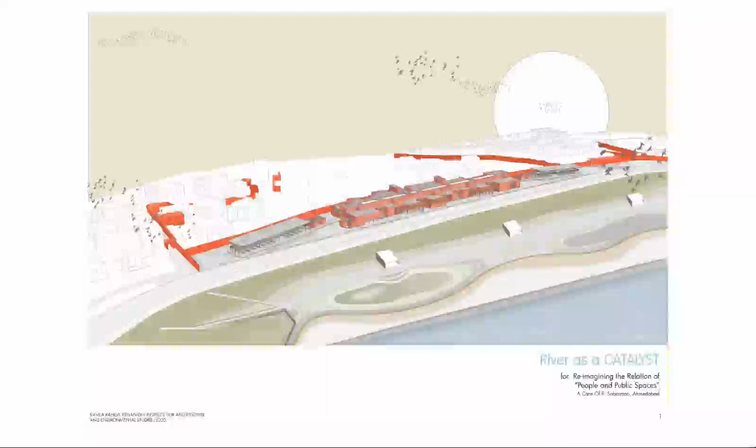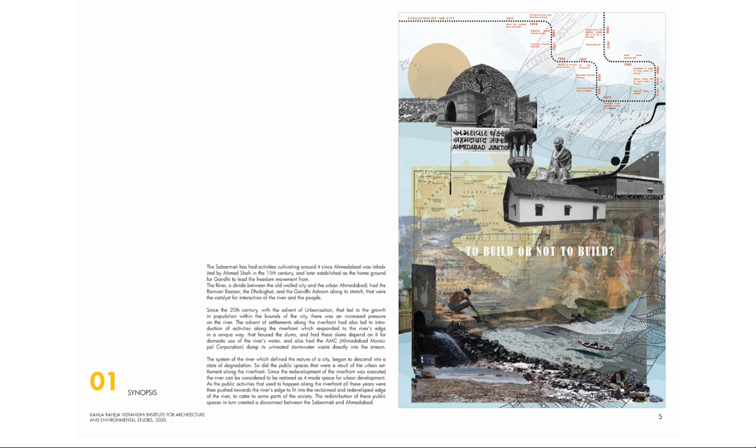The topic of research was water's edge conditions in major metropolitan cities in India. The Sabarmati riverfront, a recently redeveloped river's edge, was meant to enhance the public experience in order to give the river back to the city. The redevelopment project of Sabarmati was initiated in 1999 when an ecological corridor was proposed by architect Bernard Kohn, in order to retain the ecological belt at the center of the city and also not to disrupt the existing communities settled along the river's edge.

With growth in industrialization and urbanization, the community settlements along the river's edge increased in Ahmedabad, thus leading to its depletion, as seen in this diagram.

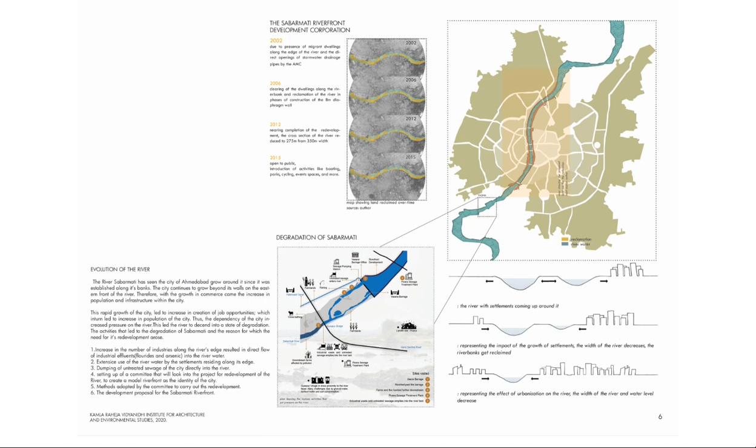In order to bring the public closer to the river's edge and create a riverfront module, public spaces were introduced along the stretch of 11 kilometers on either side of the river's edge. In doing so, the cross section of the river was shortened from 380 meters to 275 meters, and a concrete embankment was created to hold the water that was redirected from the Dharoi and Narmada Canal on the northern face of the city's river.

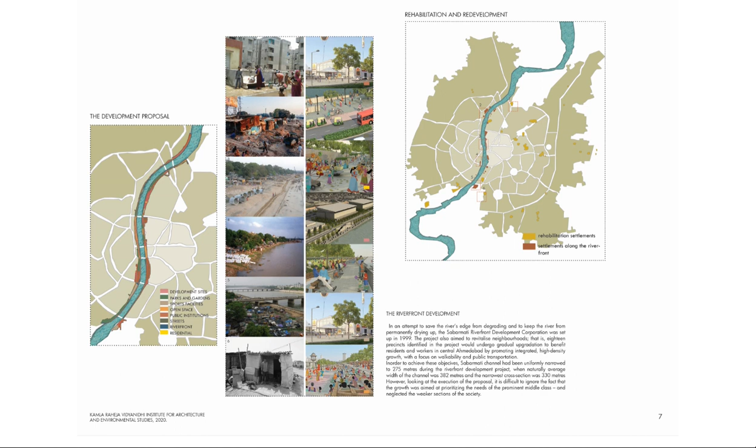In order to study the effects of the development on the existing thriving public spaces along the riverfront, four sites were identified that interacted directly with the river's edge before its development, namely the Gandhi Ashram, the Bhikhabhai Garden and Sanskar Kendra on the western edge of the city, and the Ravivari Market on the eastern.

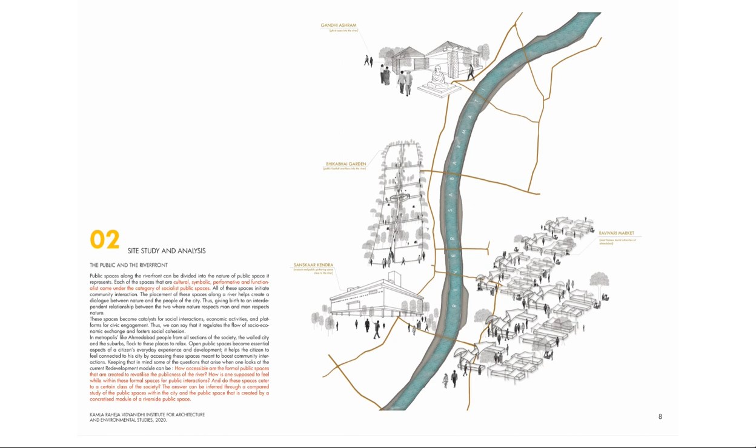The sites were classified into types of public spaces they incorporated, namely the Gandhi Ashram as the symbolic public space, Bhikhabhai as the functionalist, Ravivari as cultural, and Sanskar and Tagore Hall complex as the performative spaces.

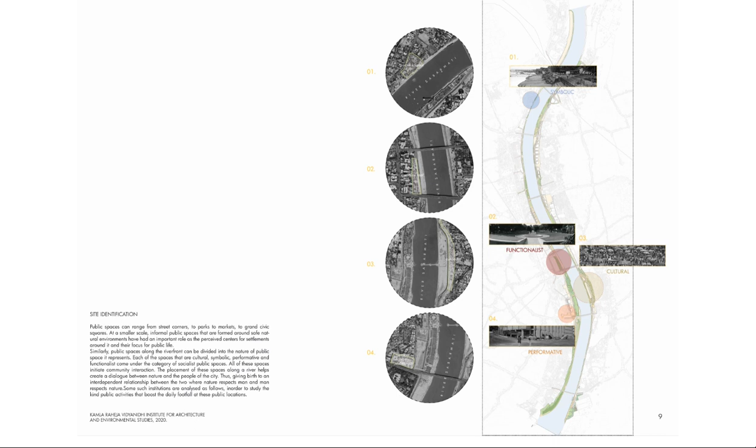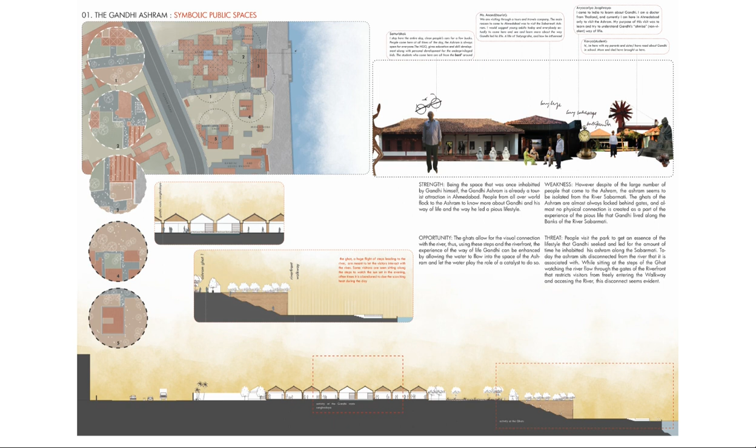The site study was divided into four parts, namely the footfall study of site, cross-sectional study of the activities along the river's edge, site interviews of visitors, and a SWOT analysis based on the above readings.

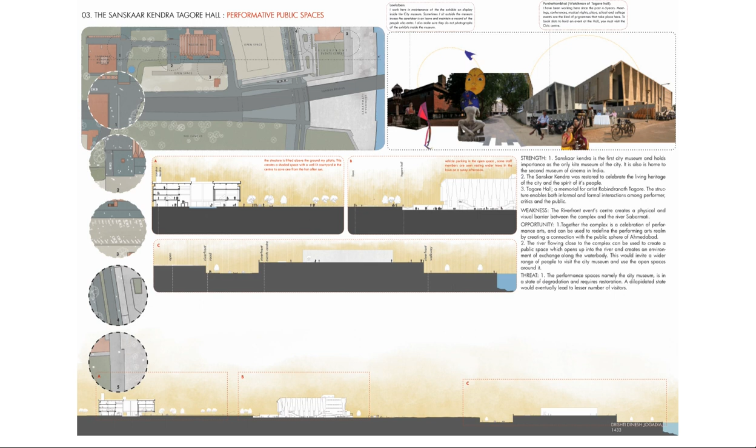This exercise led to the site of intervention being the Ravivari Market, that was later incorporated as a part of the redevelopment proposal by the SRFDC after protests by the Ravivari Gujri Association, as the original proposal took away parts of their land where the market used to take place under the Ellis Bridge, since it was established by Ahmed Shah in the 1400s.

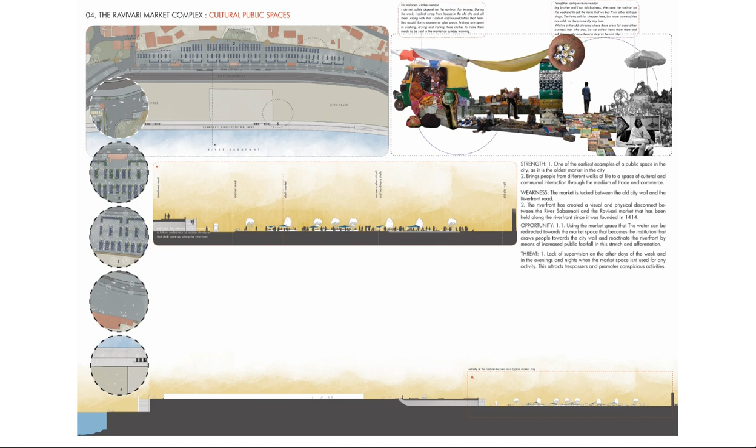The Ravivari lies sandwiched between the elevated riverfront road and the Old City Wall. The riverfront road lies at a height of 4 meters above the market road, which is at the city level. The lower walkway or the lower promenade sits at 7 meters below the riverfront road. The Ravivari lies between the Ellis Bridge and the Sardar Bridge.

The lower promenade acts as a flooding vessel in case of water level rise when the Dharoi Dam is opened once a year, and during monsoons, when the water level rises significantly to a strikingly 8-meter level height. In such a scenario, the lower promenade remains inaccessible for public use.

The neighboring complexes along the old wall include the Gaikwad Haveli police station and housing quarters, religious temples, government offices, and cooperative societies, and slum settlements along the southern edge.

The main points of vehicular access are from the foot of the Ellis Bridge in the north and the riverfront road that allows vehicles to enter the market coming from Jamalpura.

The Raikhad Darwaza also used to allow vehicular and pedestrian entry coming from the old city, but the Darwaza has been shut for use in recent times owing to its dilapidated condition. The market road allows tempos, hath garis, and rickshaws to their loading and unloading sites throughout the market complex.

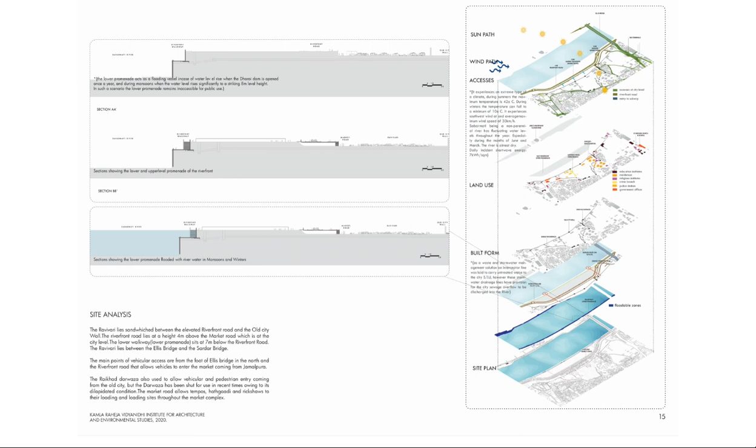Ahmedabad experiences an extreme type of climate. During summers, the maximum temperature is 42 degrees centigrade, and during winters, the temperature can fall up to 10 degrees.

The design development process included doing a study of a wider range of communities along the river's edge.

The programs were divided into public, private, semi-public, and corridor spaces, where the more public programs were placed towards the market road facing the riverfront, and the semi-private and private programs sit towards the old city wall, divided by a central connection as a series of corridors.

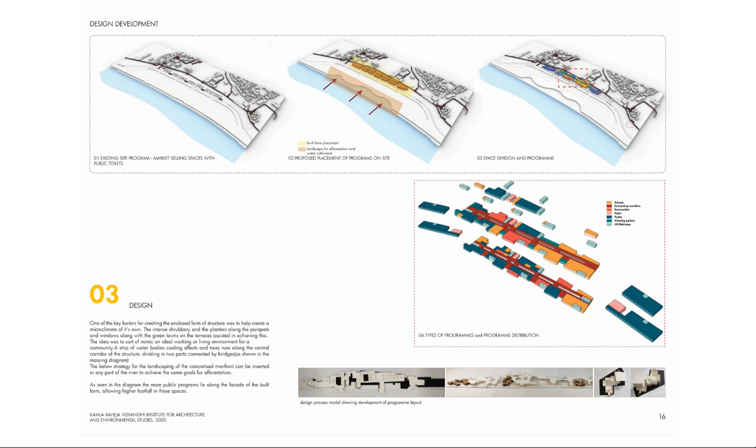The two main principles followed while designing were to revive the connection of the market to the River Sabarmati and to activate the inactive market space during the rest of the week, facilitating active pedestrian connection to the riverfront.

Program strategy: tourism. To cater to visitors of the Gujari market and its heritage, the market pavilion houses a visitors center that enhances tourism along the riverfront. The center includes an information center providing travel guidance and booking support for visitors of the riverfront, the Old Walled City, and the rest of Ahmedabad.

The center hosts exhibitions that boost the art culture of Ahmedabad and provides a platform to exhibit artists' artworks. The Karnavati Art Gallery at Pikabai Garden, in collaboration with the Ahmedabad Municipal Corporation, invites artists to perform and hold workshops at the center.

The market and the Ravivari Association. The market, considered one of the oldest in Ahmedabad, started by Ahmed Shah himself in the 15th century, used to take place weekly along the River Sabarmati. The aim of the redesign was to revive this informal heritage and let it take shape along the river while redefining its relationship to the recently developed riverfront.

In order to attract immediate communities and settlements towards the riverfront to interact with the river's edge and reactivate the presently inactive market space, provisions for children and families have been introduced. Settlements along Jamalpura and the Gaikwad Haveli Old Wall have children who play along the parking spaces and the riverfront road, where they also currently reside. The design provides teaching and daycare facilities for these kids who cannot afford going to school.

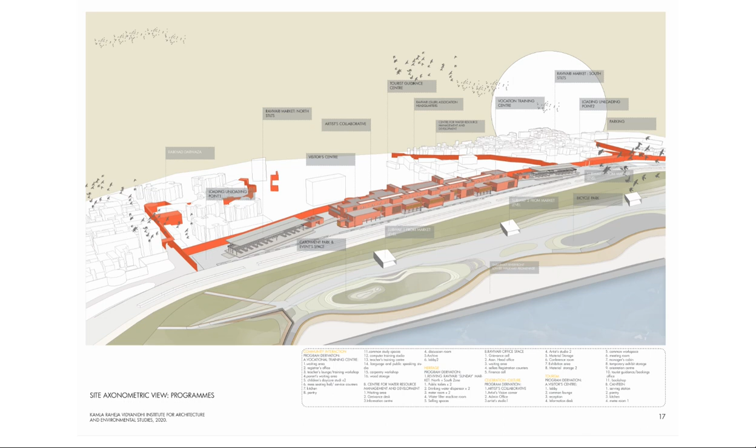The aim of the programs was to attract people from not only the adjacent communities but also different income groups of the city. Based on these factors, the programs derived for creating a more public-friendly riverfront institution are as seen in the diagram.

Loading and unloading points, Ravivari Market North Stalls, Visitors Center, Artist Collaborative, Tourist Guidance Center, Ravivari Gujari Association Headquarters, Center for Water Resource Management and Development, a Vocational Training Center, Ravivari Market South Stalls, another Loading and Unloading Point, and Parking Space. The landscape adjacent to the riverfront includes a catchment park, an event space, and a bicycle park with bicycle pathways.

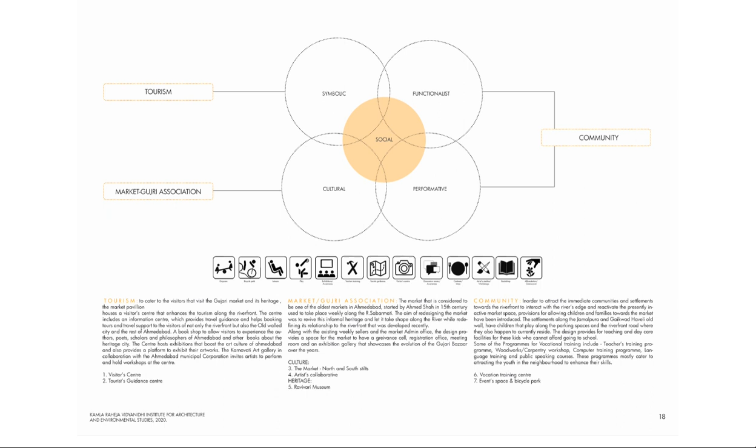Seen here is the master planning strategy for the site. The design intervention can be divided into three parts: the market strategy, the landscape strategy, and the built form strategy.

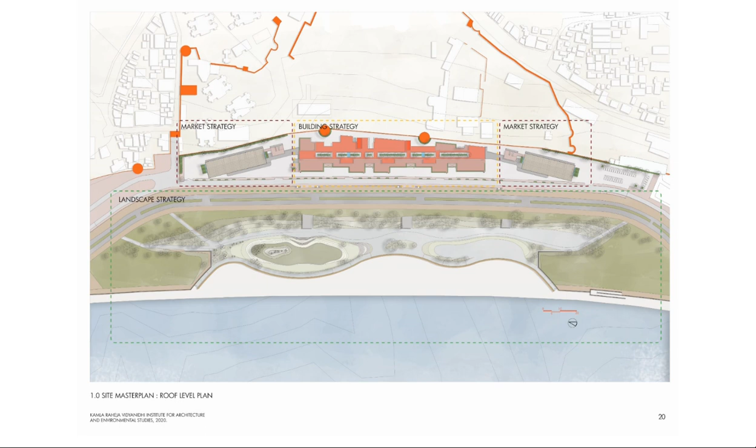Starting with the landscape strategy, the purpose of landscaping, as explained earlier, was to reintroduce an ecological belt along the river's edge for a more shaded and natural arena for public activities like bicycle riding, event spaces, running tracks, and plantation drives, as part of the initiative for the Center for Water Resource Management and Development.

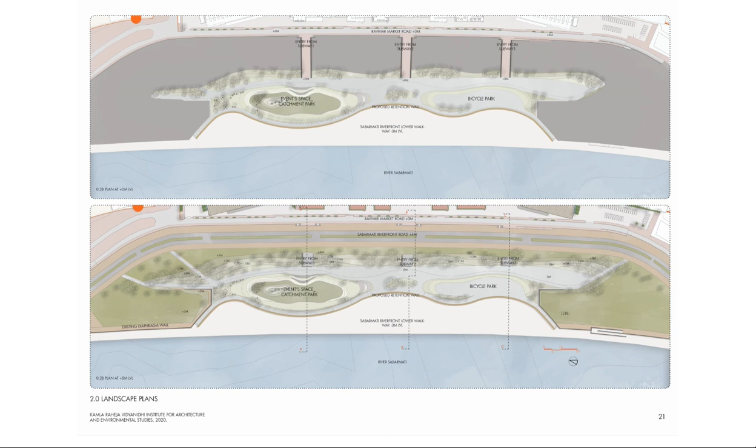The landscape sits between the lower promenade and the market road. The foot flow of the public to the landscape and lower promenade takes place through three subways that lead to the 4-meter level mark, where one can access the catchment park and bicycle paths.

Seen in these sections are the activities that take place at different cross sections along the riverfront.

The form of the landscape was achieved by inverting the existing diaphragm wall inwards and introducing a retention wall to hold the bicycle pathways and prevent soil erosion during water level rise.

During monsoons and flooding, when the Dharoi dams are open, the river tends to flood and rise to fill up the lower promenade as seen earlier. The retention wall introduced allows this overflow to be held temporarily in the catchment park while the water level subsides.

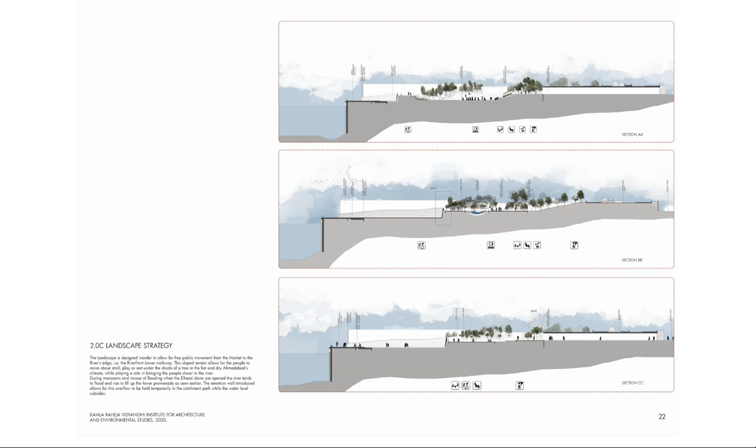Seen here is the ground floor level plan of the market strategy. This includes a vehicular entry, a loading-unloading zone, selling spaces marked by raised platforms 500 mm above the plinth level, connected to a toilet block with a water dispenser system.

At the first floor level, the market is again defined by selling spaces of 500 mm raised platforms for selling.

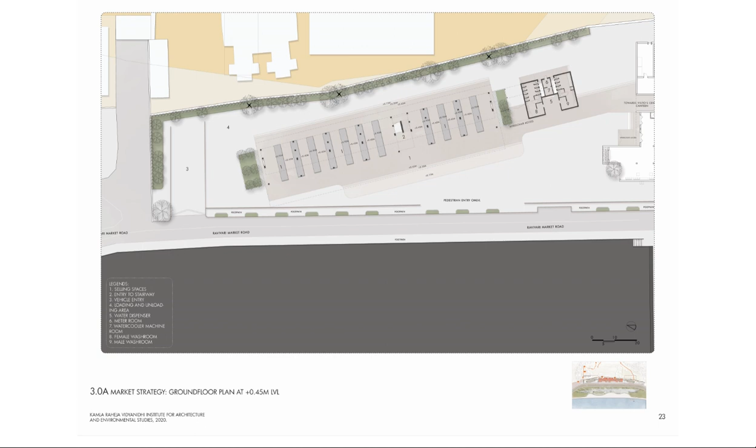The ground level plan at 0.45 meter level for the building strategy includes canteen, visitor center, waiting rooms, artist corner, artist studio, admin, material storages for artist studios, pedestrian entries, toilet block, staircase blocks, registration offices for the Ravivari market, the chairperson's office of the Ravivari market, finance cell, information center and grievances cell for the Center for Water Resource Management, a mess, selling stalls, kitchen, and 2 daycare studios.

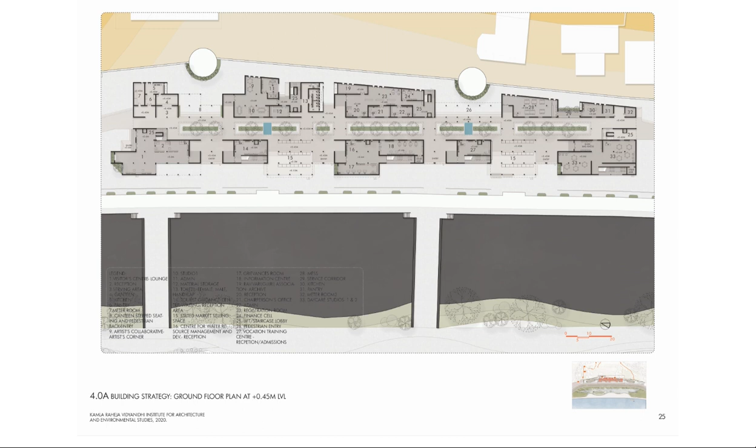At the first floor level, the programs include orientation center, bookshop, artist studio, meeting room, tourist guidance center, admin offices, discussion room, archive, artist exhibition space, open public workshop space, students common area, computer training program studio, carpentry workshop studio, teacher training workshop, and language training workshops.

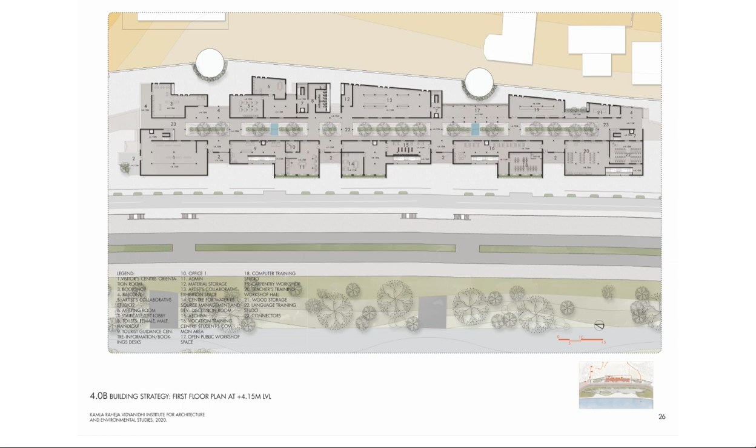At the second floor level, the programs include viewing galleries, terrace decks, permanent exhibition halls 1 and 2 for the Ravivari Market Museum.

A long section cut through the 3 built forms on site shows market activities at loading-unloading points and selling spaces at both levels in the North and South Street markets.

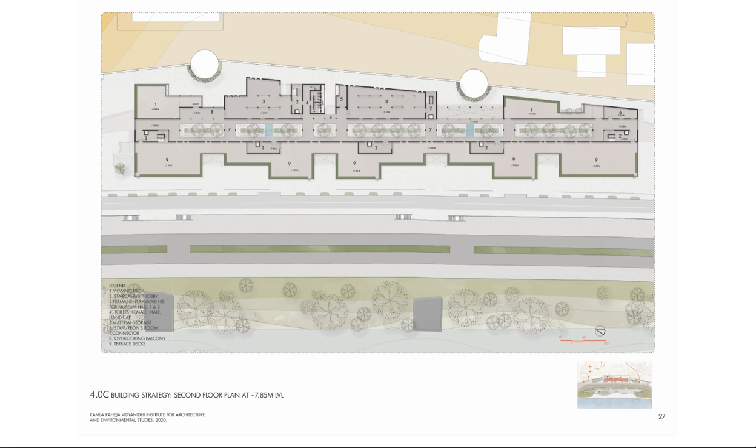The built form shows a staircase at visitor center leading to the orientation room and terrace deck, a balcony overlooking the pedestrian back entry to the courtyards, and a double-heighted public workshop space and entry to the carpentry workshops.

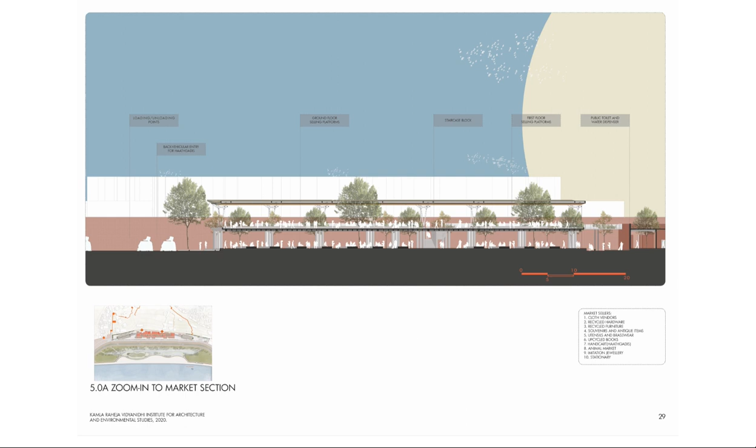Section 2, showing market activities at the ground level stalls between the Water Resource Management Center and the Tourist Guidance Center.

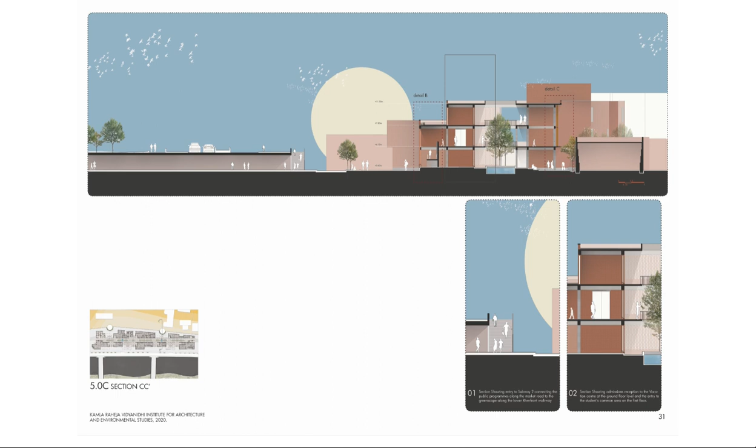Section 3, showing Subway 2 connecting the public programs along the market route to the greenscape along the lower riverfront walkway. Section also shows admissions reception to the visitors center at the ground level at the entry to the students' common area on the first floor level.

Section 4 shows viewing gallery between the visitors center, orientation room, and the tourist guidance center at the first floor level. This section also shows entry from the North Stills Market and the entry to the Artist Collaborative at the ground floor level and the Ravivari Museum at the second floor level.

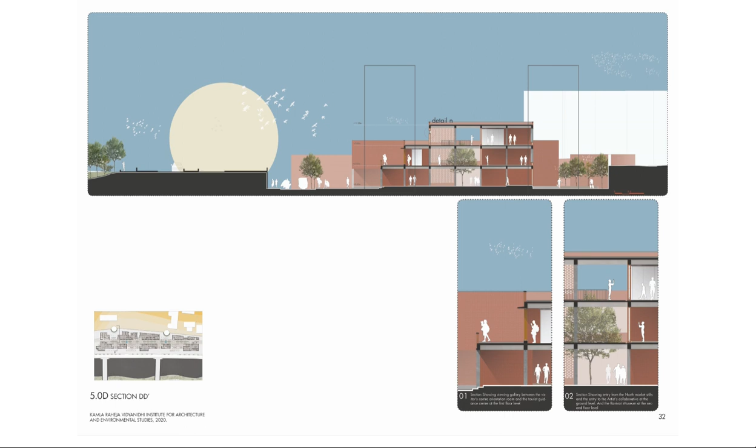The materials used were brick, RCC, wood, and steel. Cavity walls were used in order to create insulation during the extreme harsh summer climate of Ahmedabad. Wooden fins are used for sun shading the facades and the connectors, with pockets of viewing decks overlooking the riverfront.

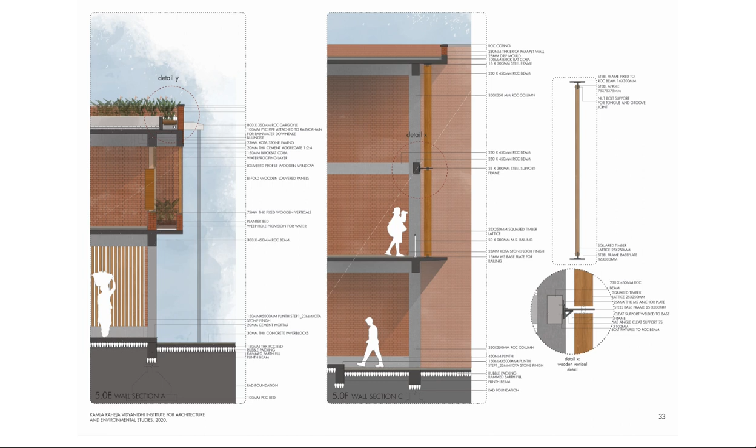The market roof was designed to create a play of light and air in the selling spaces while not completely enclosing them, retaining the openness of the market.

The structure is supported by MS columns, 100mm dia verticals and 75mm dia branches. These comprise three posts, which above a height of 3 meters branch into painted steel tubular biarticulated links. Each post system is triangulated to give transversal strength, and each gives 6 points of support to the roof.

Beneath this cover is a screen made of a dense grid of thick planks of 50 by 75mm timber. The screen filters direct sunlight and creates a play of light and reflection on the wood, highlighting the roof line.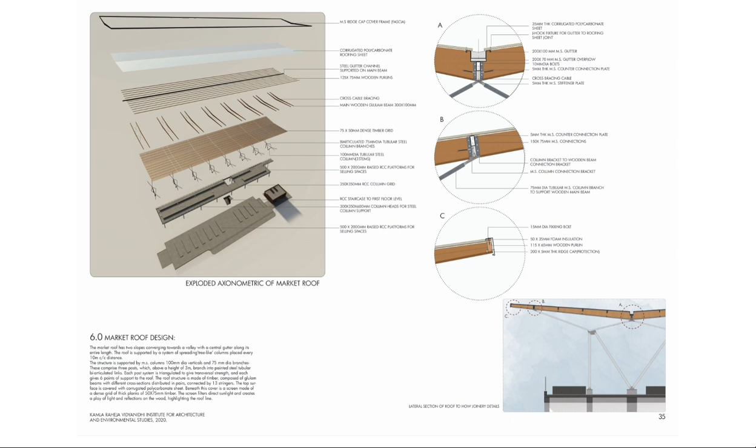Views showing entry to visitor center, entry to viewing deck overlooking the riverfront, view of back entry to north stilts of Ravivari Market, pedestrian back entry, public workshop space, and selling of north stilts from Visitors Center viewing gallery.

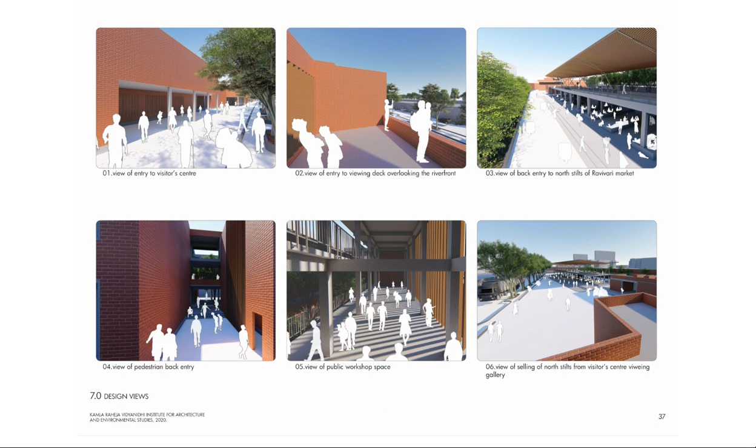The design analysis included study of hardscape on site, softscape cover, and trees to be planted along the riverfront, lining the pathways and catchment areas, selected keeping in mind the dry and humid climate of Ahmedabad. Such trees require less moisture and can grow enough to provide shade on hot and dry days.

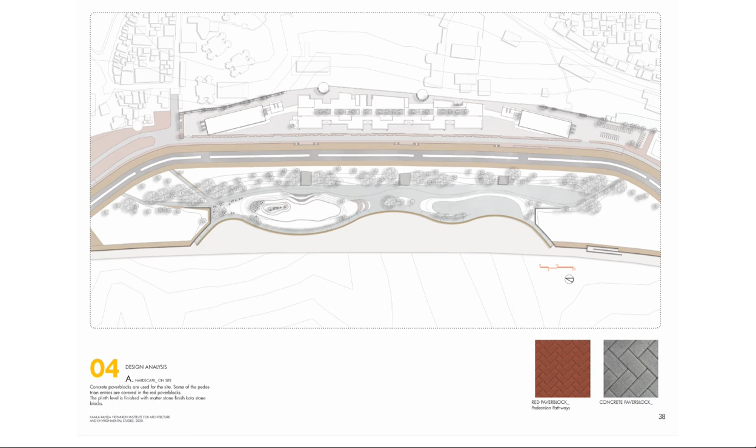Site level vehicular access.

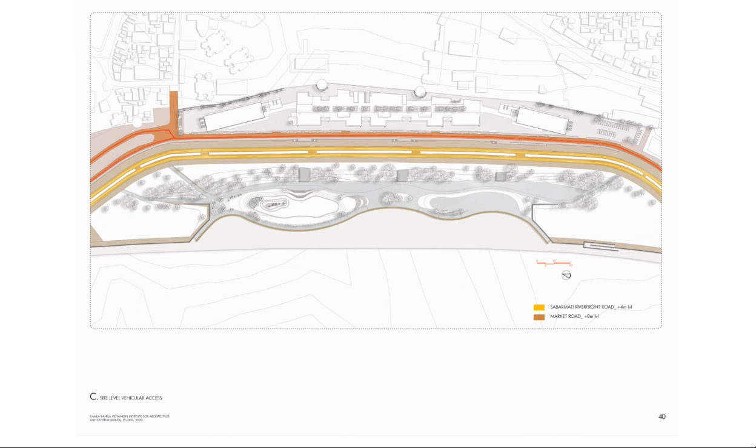Pedestrian movement at various pedestrian entries along the site, and pedestrian movement at the landscape at riverfront level.